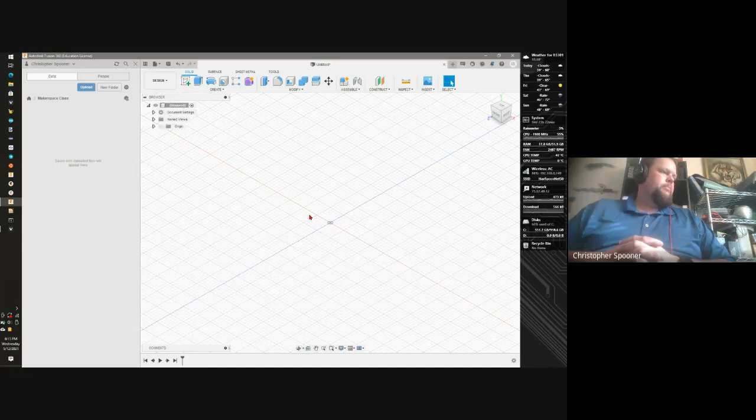Good. Andrew's there. Doug, Sandra, you all set? Yeah, I'm there. Okay. So I'm just gonna hit home. Your screen should look pretty much like mine does, right? We're all at the same place. Thumbs up. Yes. Okay.

So let's talk about the setup for Fusion 360. Inside of here, all your saved files will appear. You can have multiple files inside a project. You can have assemblies inside a project. You can have multiple assemblies inside a file. Some of the project management stuff with Fusion 360 can get a little bit complicated. We won't get to multi-part projects till our third class. We will get there so you can sort of see how to build more complex shapes.

Up top, we have our toolbar. And under each of these, if there's an arrow, there's more tools underneath it. The UI is also scalable. So if, say, your window is smaller, the number of buttons available will hide more under the menu. If you have a bigger screen, you'll have less stuff hiding under the menu. Does that make sense? Yes. So occasionally things won't be exactly where they are on my screen.

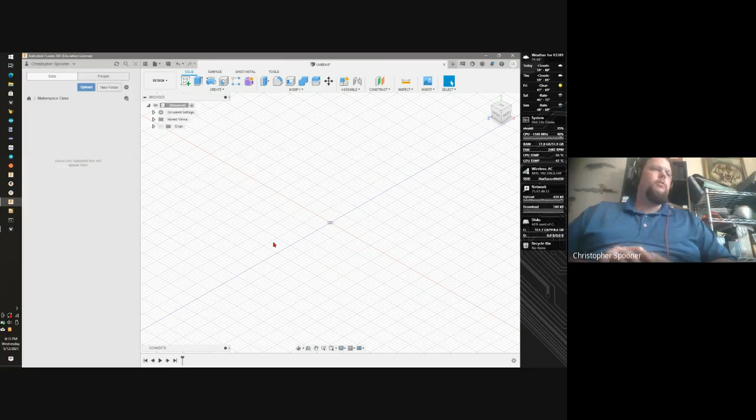Over here we have our browser to show us our sketches, our objects, our bodies. And at the bottom we'll have our timeline, which is where every step we do will get stored. That's really useful because the real power of CAD comes back to the fact that after I make something, I can change it really easily after the fact. So the way Fusion typically works is you work from 2D sketches and you pull those to 3D. Then you create a new 2D feature and pull to 3D.

So if I was going to, say, model a soda can, what shape could I start with? What 2D shape? Rectangle. I could draw a rectangle and then spin it about the axis. Or what else could I do? You could do a circle and stack it. And pull it up. Exactly. So there's two different ways. And is one better than the other? It depends on what you want to do.

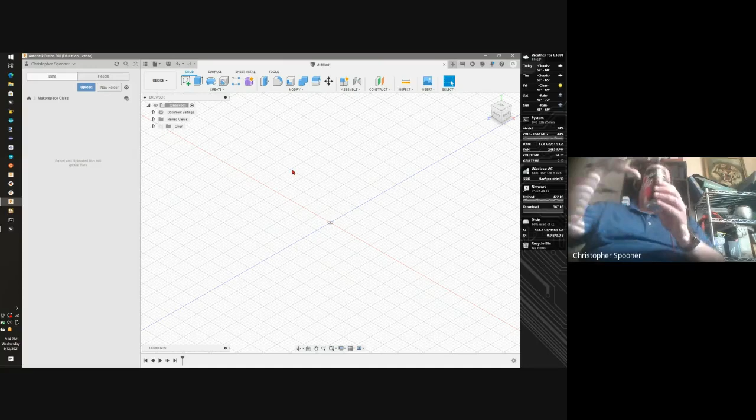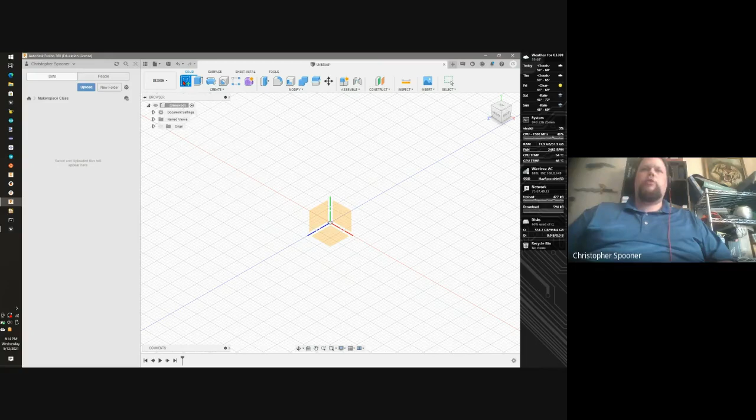With Douglas's method, we can get all this detail sort of thrown in on the first try and make it sort of a fancy outline shape and then spin that all at once. Sandra's method would give us a simple model first and then we could build up more complexity over time. Both have their advantages and disadvantages. But let's start off by creating our first sketch. So the button we're going to be using is the Create Sketch button. It has the little plus sign. And if you hover over any button, it will show you more details about that thing.

Now, after you start the button, you have to tell it where you're going to place that. And we have three options, really. We have the XZ plane, the XY plane, and the YZ plane. I tend to work on the XY plane. The only downside to working that way is that when you bring stuff into your 3D printer, it's going to come out sideways because Fusion thinks the XY plane is your screen and Z is coming out of your screen, whereas your 3D printer thinks the XY is the table and Z is going up.

But let's start on the XY plane, and that's this one back here. You should see the cube rotate, the navigation cube, which is right here. Rotate to the front. And let me know when you're at that. Let me know if you have a problem getting to this view. Hey, Chris, I didn't get the same thing when you hit create. The sketch? Can you back up one second? Yep, you said click on Create Sketch. Yeah, unfortunately, I don't have a separate monitor, so I'm sharing tiny screens here. Okay. Click that. Okay, got it now. And then I'm gonna pick this view, this side. So I'm looking at the front of the cube.

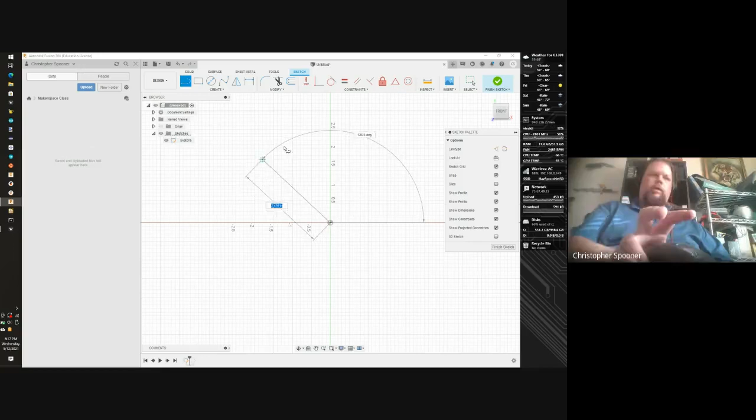So basically in CAD, place points. And I'm going to move straight out to the right, and I'm going to place a point. I'm not going to worry about how big the square is. I'm just going to place a point, and it's going to create another line.

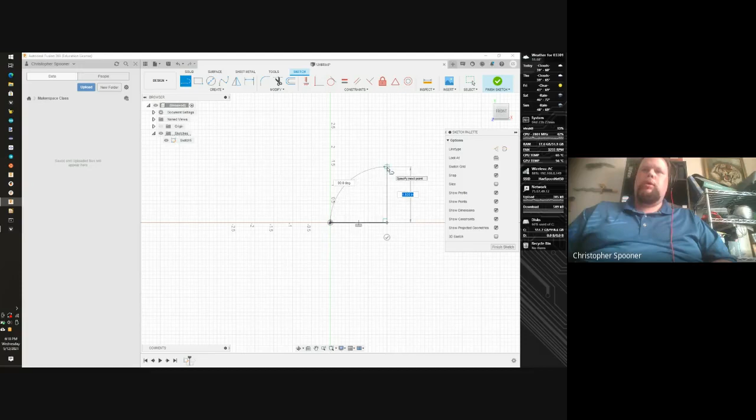I'm then going to create my second point vertical to my first point. It's going to sort of snap and create. I'm going to snap back over my first point. So I'm coming back around, making a reverse C, and I'm going to come back to my first point. And now, there's no more lines coming out of it because I have a closed shape. Does everyone have a square? Or a rectangle? I have a rectangle.

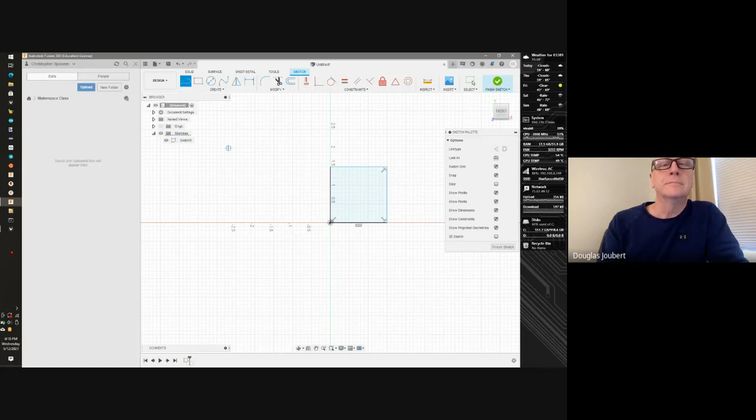Good. Chris, I had a rectangle, but it didn't move like yours did. You want to share your screen quickly so I can take a look at what yours looks like? Yeah. Let's see. It's under the present button. It's going to ask to take control, and that's fine. All right, can you see that now? Yep, I see what you have.

So let's just give yourself some more space. We can actually hide that left-hand panel by hitting the X. Yep, that helps. There you go. All right, so let's go to the line tool. Oh, you have to click under solid. Nope. Okay, I see what you're doing. On the upper left-hand corner of your screen, there's a thing sort of like a J on its side. Yeah, click that. That's the line tool. Now we're going to click on the origin.

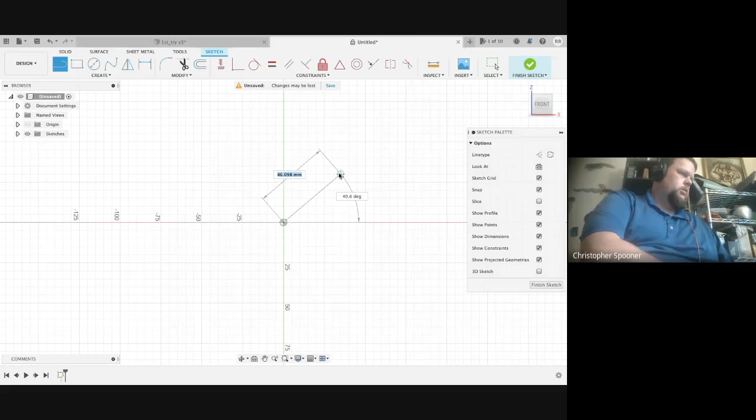And now go straight over to the side. Click. Now go up. You don't have to click once. So go straight up, so it's vertical. It'll snap. Okay, hit escape. The escape key will stop us from doing anything. Okay, so let's Control Z twice. Oh, Command Z, I'm sorry. Command Z twice. There we go. Okay, so let's go to the line tool again, because escape got us out of the line tool.

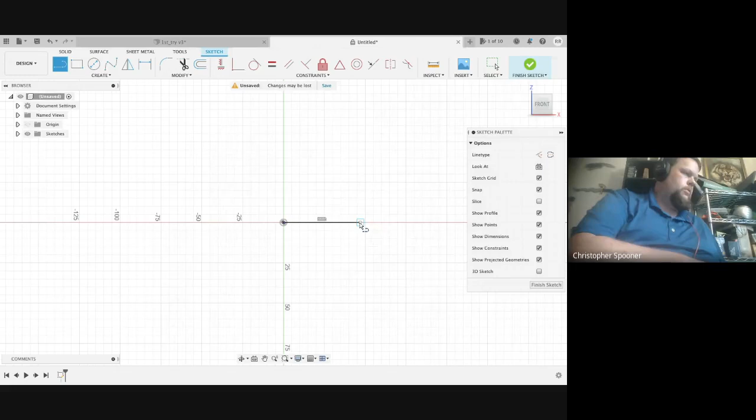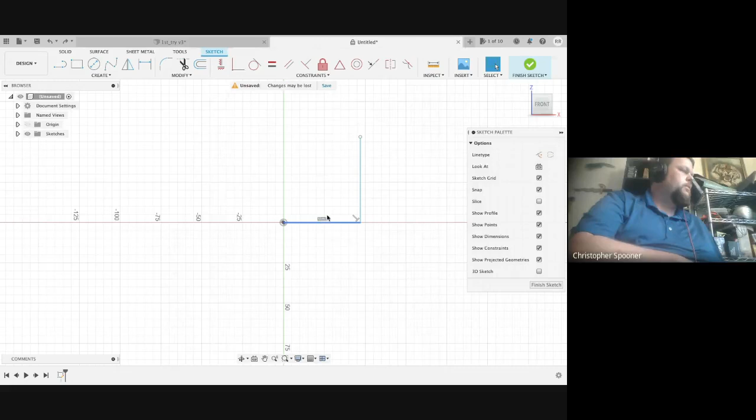So reselect the line tool. No, we have to go back to the line tool, the sideways J. Yep, there. Now click once, down, up. Now go straight up. Click down, up. Oh. Click. Now go to the side. No, not click and hold. Click, let go. Hit escape. Control Z, it's okay. Go to the line tool again. Every time you hit escape, it gets you out of the tool, so go back to the line tool.

Now, the trick is you can't click and drag. You click, down, up. Move your mouse, down, up. So click. Now move it straight over to the side. Click, down, up. Now come back to the origin again. All the way. Down, up.

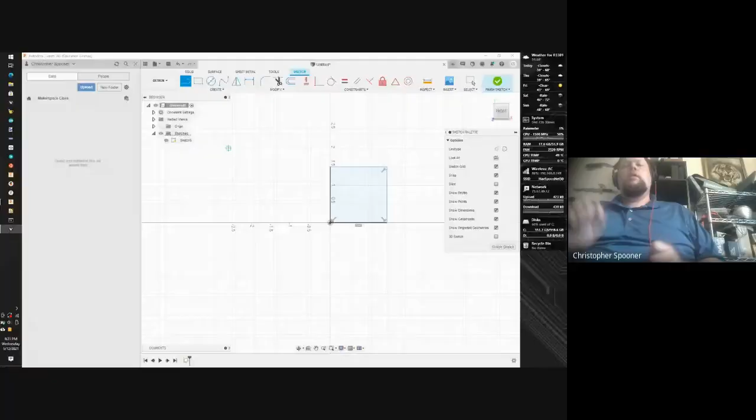Good. And that's exactly the reason why I do this exercise with the line tool instead of using the rectangle tool. Every tool in CAD is click, release. There are some tools that are click and drag, like the tangent arc tool, which is good to know, but it can cause problems. So that's why I draw this rectangle exactly the way I did.

You're not the first person, nor will you be the last person, to have a problem with drawing the lines initially, because it's not anything you've dealt with. If you've dealt with art programs, they're click, drag, release, not click, down, up. Okay. All right.

So let's talk about navigating this space. I'm not sure, Doug, on yours, but if you have a mouse wheel, if you push down on the mouse wheel, we can pan and move around. If we push down on the mouse wheel, which is middle click, you can drag.

I'm not sure what yours will be. I didn't know my middle button pushed down. Does it? Yes. Good, good. We can also zoom in and out by using the mouse wheel. Now, the zoom follows your mouse cursor. So if you're right over your shape, that will be the center. But if I'm over here and I zoom, it's going to zoom over here.

Lost. Got it. If you click on the front of the navigation cube, it will recenter. Oh, sorry. It's got a line tool. And then click on the front of the cube, and it should recenter itself. Really?

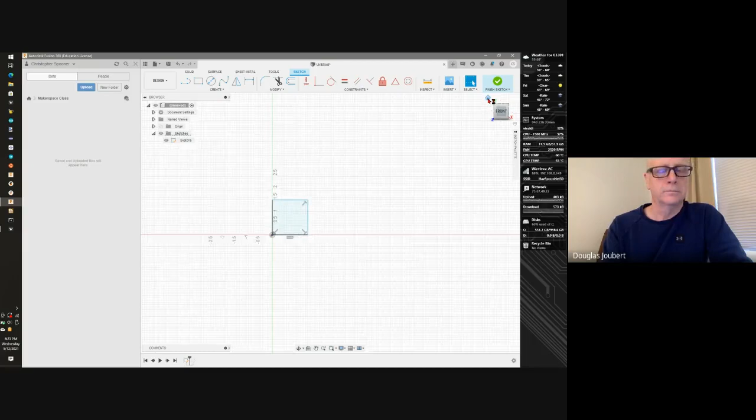Okay. If you get lost, sorry, this is where Inventor and Fusion are slightly different. If you get lost, if you navigate over the navigation cube and click the little house, it will bring you back to your home view. If you click front, it will rotate you back so you're looking at your thing.

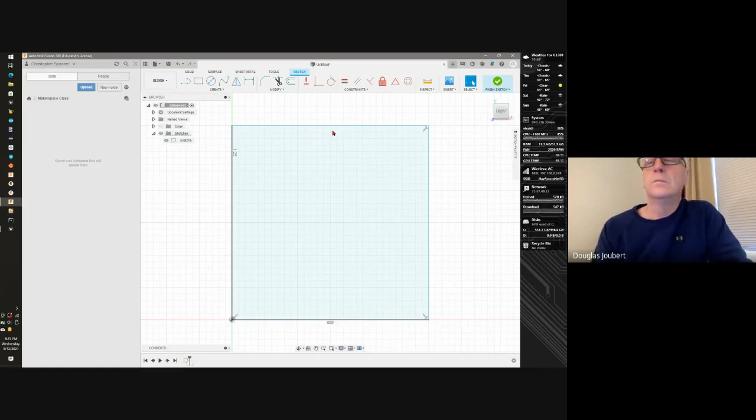Now, if I look at this square, you'll notice that two sides, this bottom and this left side, are black, but the right side and top are blue. I'm going to hit escape to make sure I'm not in a tool. If I grab this point, I can move this around. But if I grab this point here, I can only move up and down. I can't move left and right. Same with this point here. I can only move it back and forth, but not up and down.

And the reason I can't move those is because this line and this line are locked. They're constrained because they're tied to the axis, and it guessed the right angles. Whereas the two blue lines are unconstrained. It knows they're right angles, but doesn't know how big they are. Comfortable with moving around and where we are?

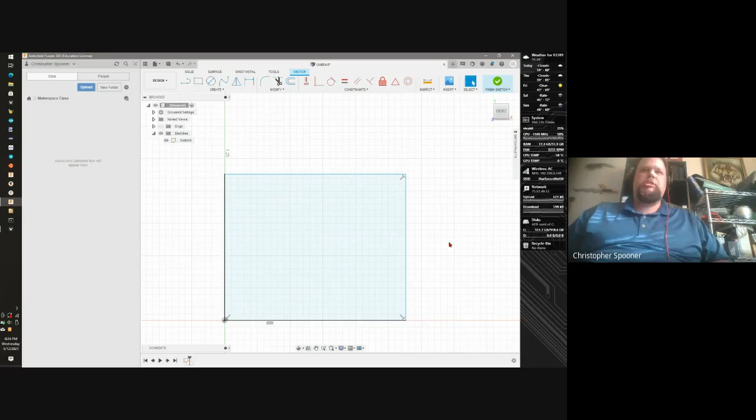Yep. All right. So if I'm going to 3D print something, I can make things any size in CAD, and I don't know how big they are until I dimension them. They do give you the rulers on the sides of Fusion to give you an idea of how big you are, but really, I need to set a size. So what we do is we're going to set dimensions, and that's this goalpost button right here. Also notice there's a little parentheses D. That means if you press the D key, it will automatically bring up that tool.

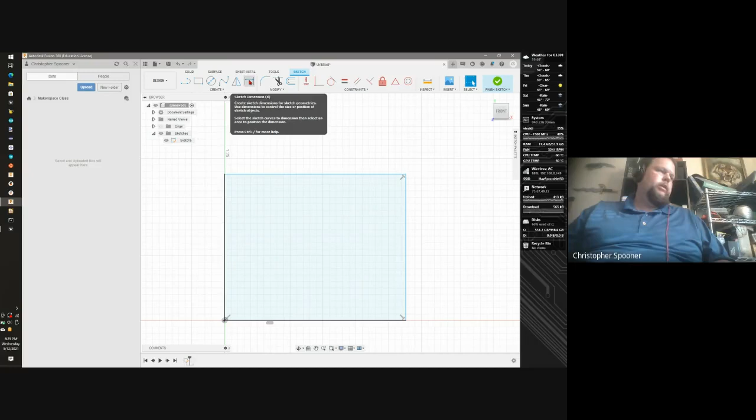So now we're going to dimension. Dimensioning works sort of like drawing a line. We're going to click on what we want to dimension, and then click to place the dimension. So watch first, and then I'll undo it. I'm going to click on this line, then click again to place it and edit it. So dimension tool, click on the line, drag up, click again. And I'm going to set that to 1.

Now, the only thing that's not locked down is the blue line, the top. So I'm going to click on the left or right side, doesn't matter which one. I'm going to click and make that also 1. At this point, the square is black. Let me know if you have a problem with this point.

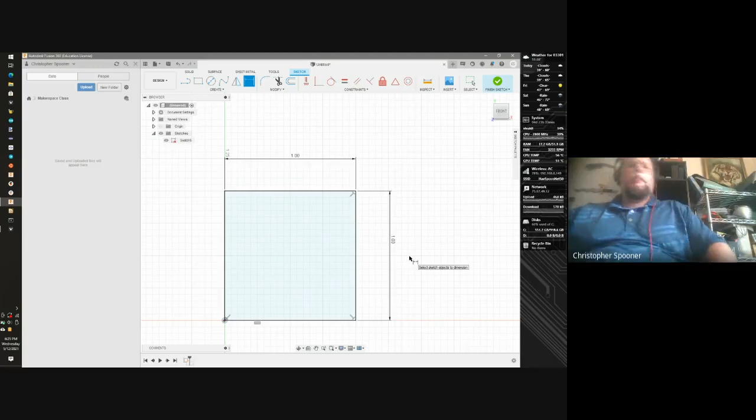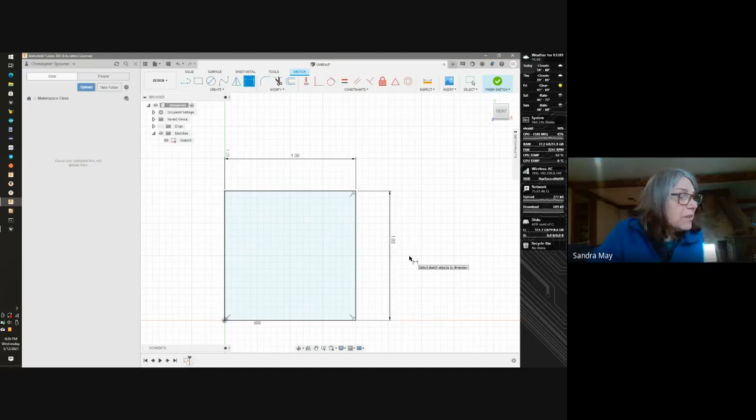Chris, my thing doesn't look like yours. I don't actually have the line showing from end to end. I do have a measurement. Yeah, can you show me your screen so I can take a look? Can you talk me through that? I'm sorry. Yeah, of course. In the Meet view, there is the button on the bottom left-hand corner. There's raise hand, turn on captions, and then present. Click on the present button. Okay.

It's going to ask you to share screen. It's going to ask which one. Share the one with Fusion on it. Otherwise, I can't see it. And then click share once it pops up. So it's going to pop up a little window asking which one. Okay, there we go.

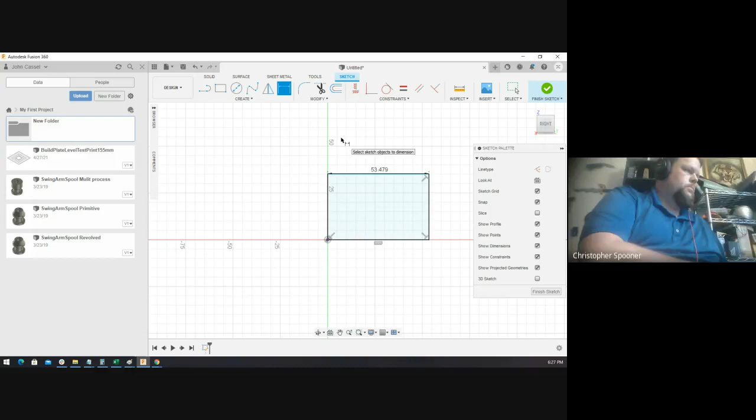Okay. Aha. So I know part of the problem. We will fix that. Should I give you your screen back? No. It's fine. So hit escape right now, just so you're out of whatever tool you're in. The escape key is your best friend in CAD. What happened is you clicked twice on the line really close together. So hit escape, so you're outside the tool. Yep. And now click on that 53.479 and just drag it. Click and drag.

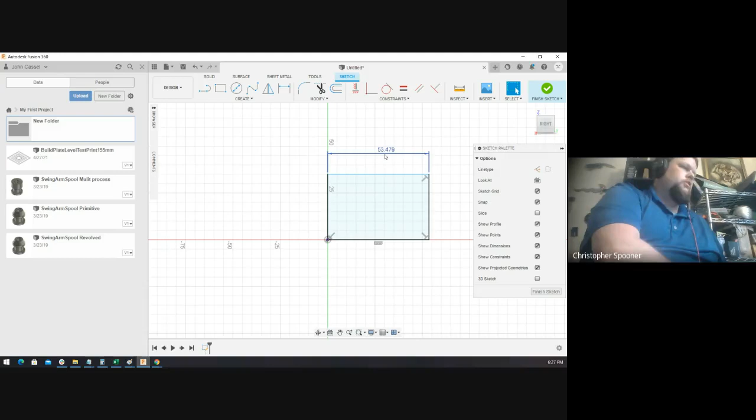There you go. Thank you. And you're gonna do 25 instead of 1. Okay. You're in millimeters, and I don't know how to change the units in Fusion off the top of my head. Okay. Well, how do you change that number? Double click on that number now. Double click, okay. Yep. It lets you edit it when you create it, but if you need to fix it after, you double click. Enter. And hit enter. Yep. And then do the same for the side.

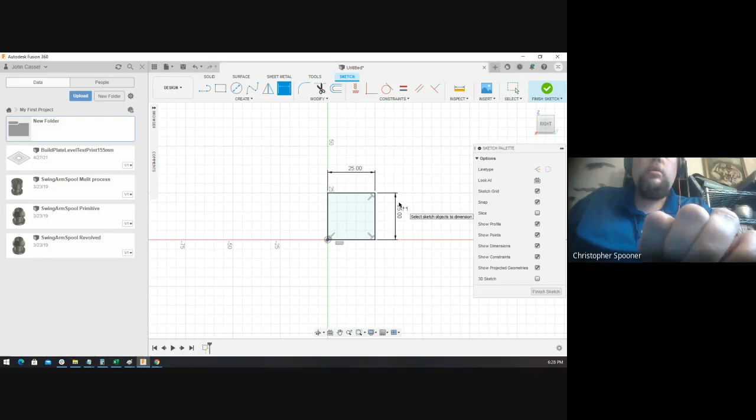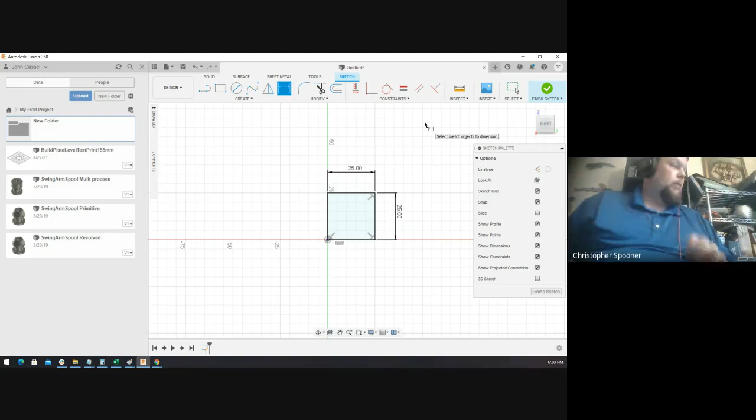I'm going to quickly jump over to a web browser and just Google how to change units. Yeah, John has a subscription, so I'm actually in his Fusion 360, so he probably has settings I may really have to monkey with. Oh, actually it's really easy. Okay. So I'm going to take over presenting, and I'll show you. I'm presenting. Okay.

So if you go up to the top left-hand corner, there's a little drop down, a little arrow here. It says Document Settings. Click on the little arrow next to Document Settings. Upper left-hand corner. Okay. And it should say Units. If we click on the little pencil next to that, you should be able to change that to inch. There you go. And now you have to resize your thing because it's probably like 0.99 or something like that.

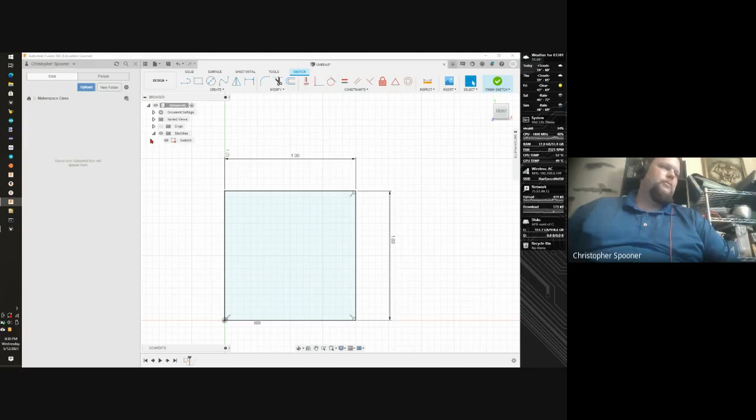Chris, they don't teach metric in schools? No, I use both, depends on what I'm doing. I use metric hardware as default because I have a bunch of metric hardware left over from my 3D printer builds. I think in English, unfortunately. My brain is stuck. I can convert back and forth.

That's why I told Sandra to do 25. She could have done 25.4 and had it dead on. But I figured if we were gonna live with metric for today, I don't want to deal with silly units the whole time. All right, so we have our square. Now, let's say I try to dimension a little more. Take a look at my screen, don't follow along. I try to dimension this side. An angry message says, adding this dimension will over-constrain the sketch. Choose OK to create a driven dimension. What the heck does that mean?

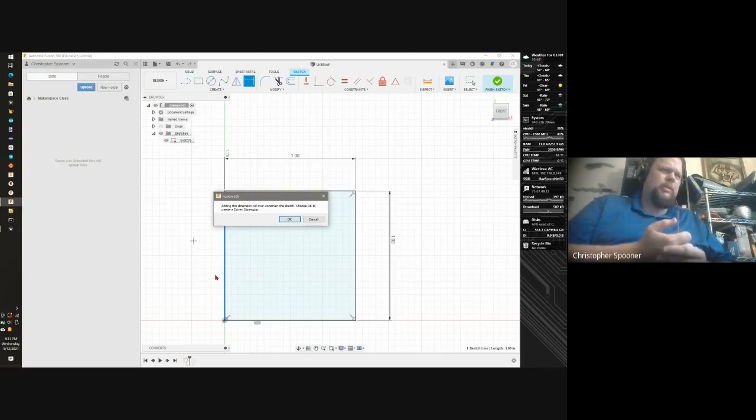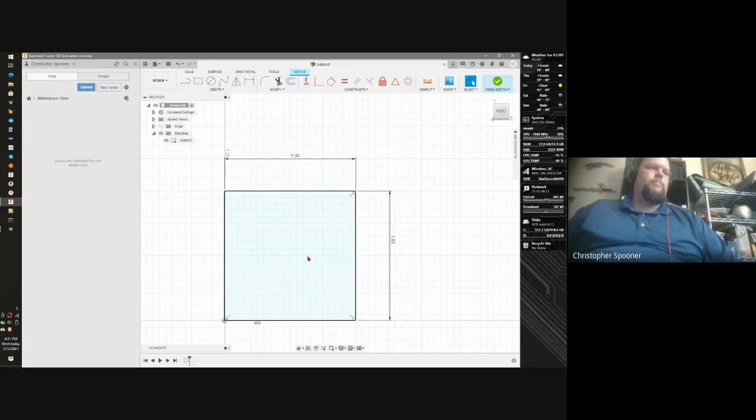Well, when I drew my square, I snapped at right angles. If everything's a right angle, and this side's 1 and this side's 1, there's no way this side could be anything but 1. Does that make sense? Yep. I can get a driven dimension, but I can't edit that number. But if I edit this number, just watch, that will automatically change to follow it. Once my sketch is black, that means I have a fully constrained sketch. That is what I'm looking for before I move on. Black is good. All CAD packages, black is the happy color.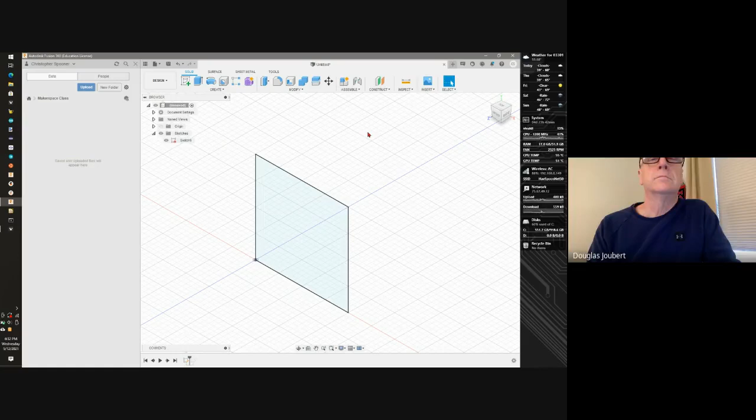All right, so we have our sketch done. It's black. I'm going to click the big green finish sketch button in the upper right-hand corner. Now, Chris, my rectangle is living in a different plane than everybody else's. The cube says I'm looking at the right side and not the front. Is that going to matter? No, it actually doesn't matter at all. You can build the whole thing in any direction. Occasionally it will mess with your horizontal and vertical constraints, but because they're both under the same button in Fusion, it shouldn't cause a problem.

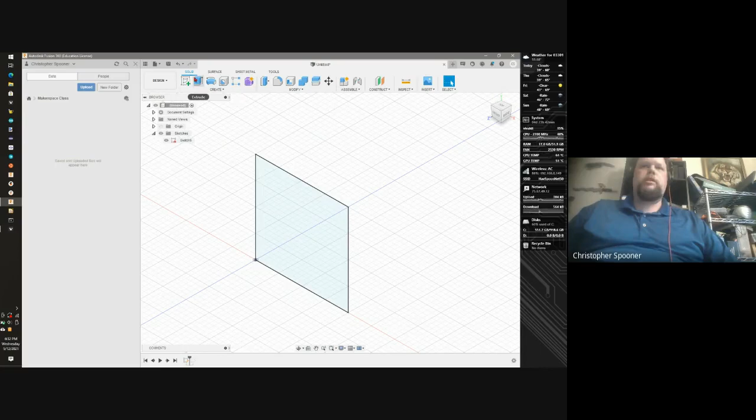So I now have a floating rectangle. I need to pull that into 3 dimensions. I'm going to use the Extrude tool, right next to the Sketch tool. And there's a text area. I can grab the arrow, but that's not how I think. I like numbers, so I type the number. I'm going to type 1, and a big gray cube.

Could you hover over where Extrude is in the menu bar? Yep. It's right next to the Sketch tool. You have to finish your sketch first. Then Extrude is right next to your Create Sketch tool. Ah, okay. It's not there. It could be under the Create menu. So remember, these buttons can go away sometimes. If they are hiding, you can click Create, and it's all there. We can hide our files now. That will give us more space.

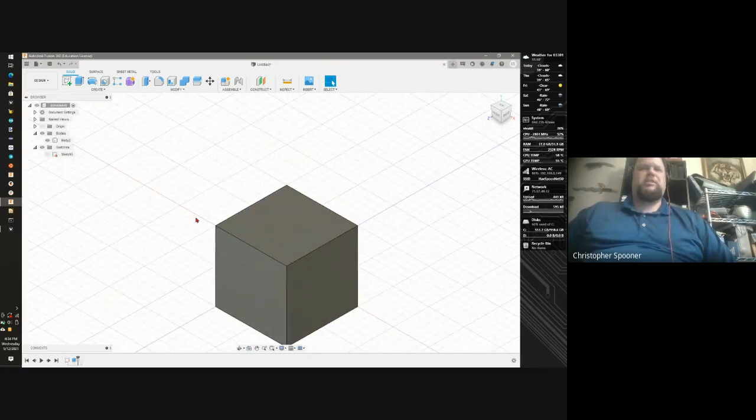Everyone have a cube, or does anyone need more time or any help? I have a cube. It doesn't have a grid background. It doesn't. No. It shouldn't really matter. The grid's just there to show you that it exists. It shouldn't affect anything. Okay. If the next thing has problems, then we'll go back and I'll take a look at your thing. But because you're running a pro account with custom settings, I don't want to.

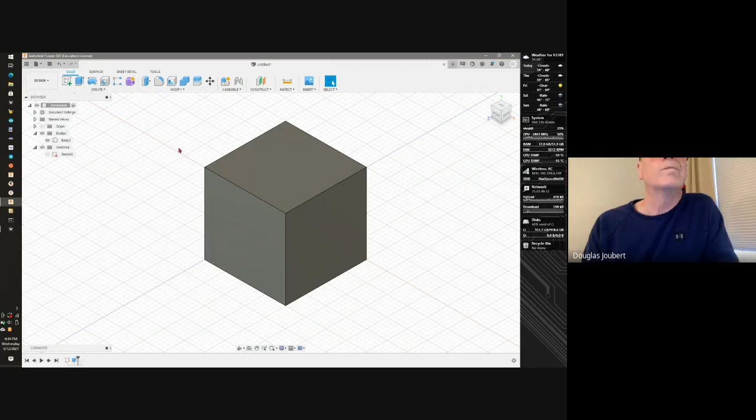Oh, I'm sorry. No. So I downloaded this ages past, and I couldn't come up with a way of telling Autodesk, oh, come on, I only used 2 of the 30 days. That's all right. You should be able to use it without a 30-day trial. You should be using the hobbyist license. Okay, I'll try to get that done before the next class. No worries. I can always help you with it.

All right. So what we're going to do is we're going to put a hole in the top of our cube. So we're not going to use the hole tool. The hole tool does not do what you think it does. It kind of does, but it's not the best way of doing things. And more importantly, it's not going to teach us the skills we need for the rest of the stuff we're doing. So we're going to do this by creating a sketch. So I'm going to click the sketch tool, and this time I'm going to select the top of my cube.

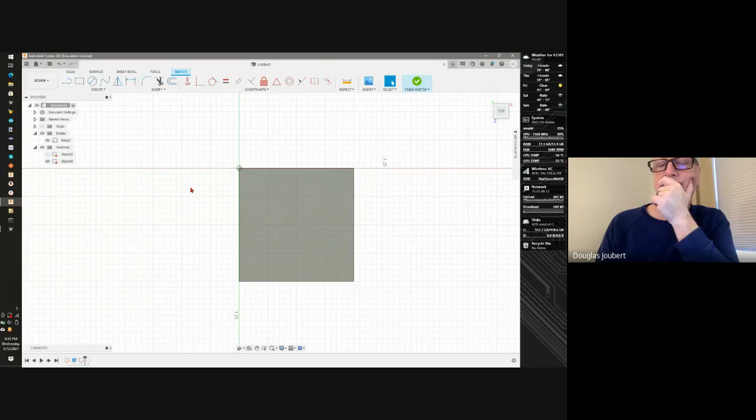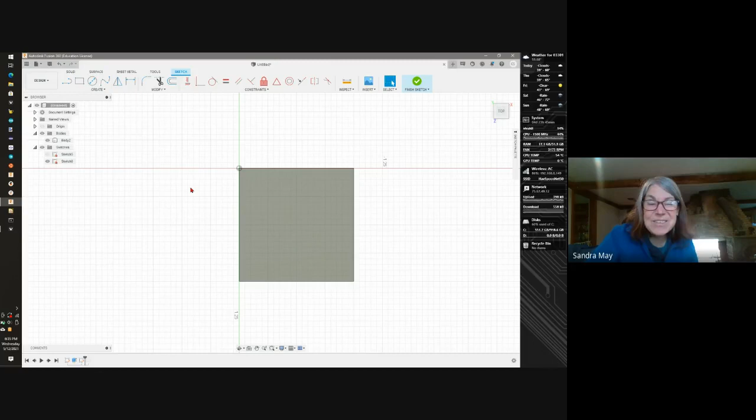If you need help, don't be afraid to ask. I mean, this is the downside of remote teaching is I can't see screens. When I was teaching this lesson back in the before times, I'd be looking around the room to make sure all the screens look like they should look. Trust me, I've seen people break things in such ways that I would not judge for it. I'm usually impressed they break so badly.

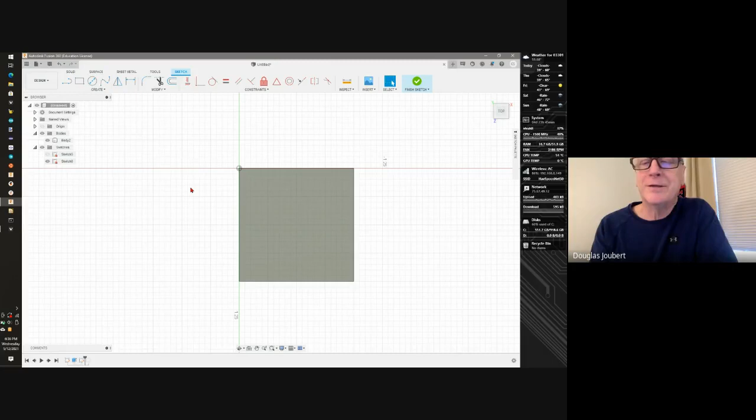So, are you at the square on top, Doug? No. Share your screen. Let me take a look. Chris, I can hear you, but I've lost the screen. What do you mean? My Alt Tab is not getting back. Hold Alt or Command Tab. You can hold Command and Tab several times. You probably opened up a third program or something. Yeah, it's not opening. Huh. Well, Chrome's still open because I can talk to you. Yeah, that's weird, but just keep going. I'll catch up. All right. If you have questions, I can always help you another time.

But we have our shape, and what we're going to do is draw a circle. So I'm going to click the circle tool, and that is the third one over. I'm going to click the center point, drag out, and click again to create the size of the circle. I don't care where I place it, as long as I don't click on a line. If I click on a line, it's going to assume that you want that center point on the line. So I'm going to click somewhere, drag out, make sure I don't click on a line again, and click, and I just have a circle in my thing.

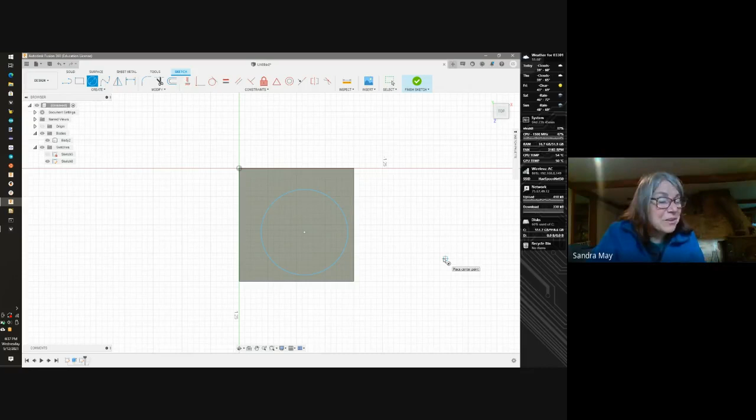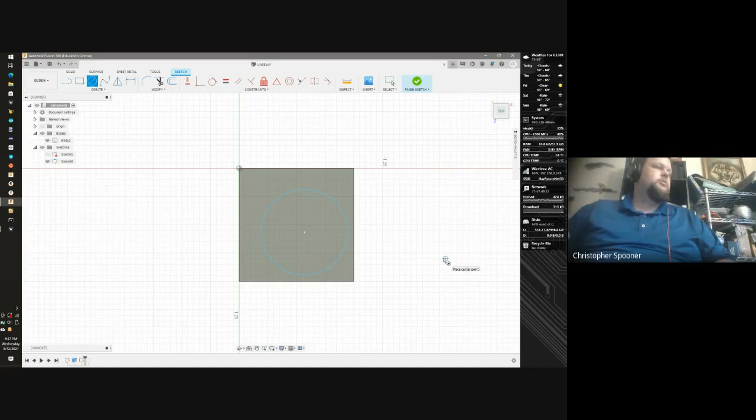I can't hear you, Sandra. You're muted. Sorry, do you have a particular dimension in mind? We'll set the dimension after. So the way we tend to work is I draw my shapes. I then use any geometric constraints, which we'll get to on our next project on the smiley face. And then once I've got my geometric constraints, I put my numbers in. So that way I can always change my sizes later.

Hey, Doug. All right. Can you see me now, Doug? I do, yes. All right.

So I drew my circle. I didn't really worry about where I put it or sizing. I just want to make sure it's inside my thing. So I tend to like to locate my shapes first and then size them. It doesn't matter which order. But there's two things that can move about this circle. I'm going to escape to make sure I'm on a circle. I can move the center point. I can also change the size.

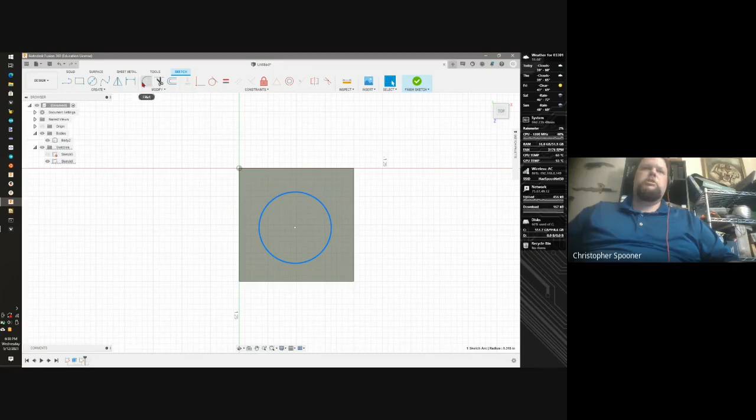I'm going to get the center point locked down first. So I'm going to click the dimension tool, and this time we're going to be doing a distance dimension. So I'm going to click the side of my square and then the center point. And I'm going to move my mouse out. And this time it's the third click to put the dimension somewhere. It doesn't matter where I put it. I just like pulling it aside. I'm going to do 0.5.

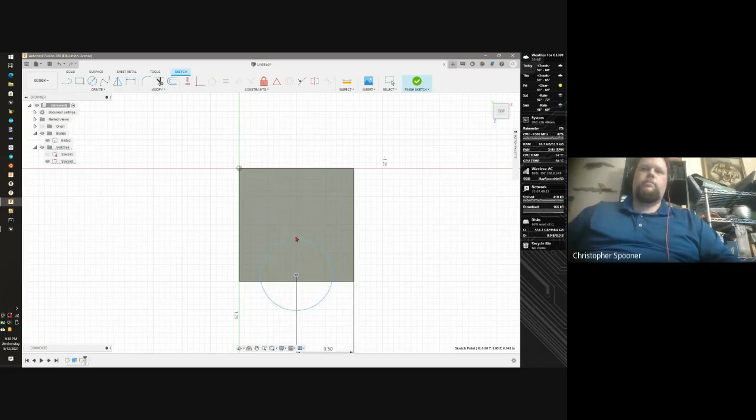So now this circle can only move up and down. It can't move left and right. I'm going to do the same thing again. I'm going to dimension, but this time I'm going to go to the top or bottom. So it's top or bottom, center point, over to the side. It doesn't matter which order I do. I can do center point, side, or side, center point. At that point, the center point should turn black.

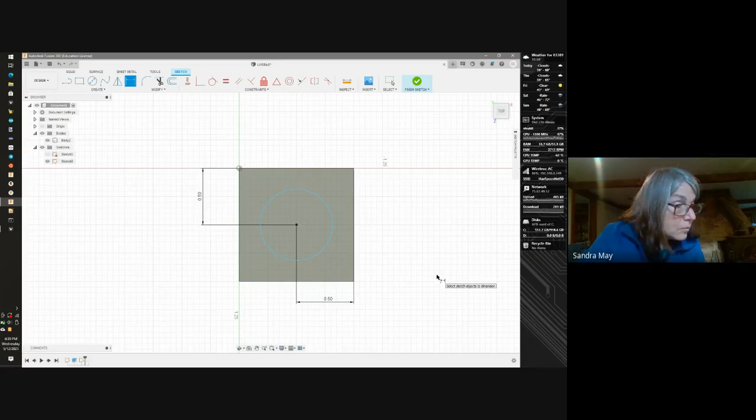Unfortunately, Fusion doesn't allow for relational dimensions as easily as other tools, so I was going to do a thing with relational dimensions, but we're not going to bother. So now that I have that located, I need a third dimension to say how big the circle is. So I'm going to click on the circle. I'm going to make it 0.5. I like the number.

And my circle should be black. If you need help, don't be afraid to ask, because we're just learning. It's easy to get yourself messed up. I always hit escape when I finish a tool because it's so easy to click on something by mistake. Everyone with a circle black, turn black.

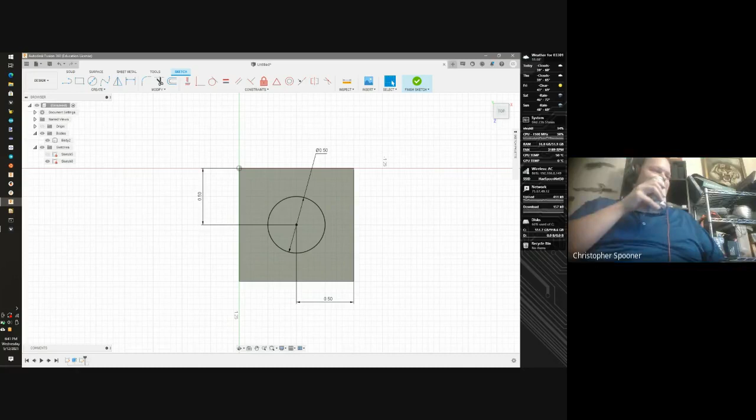Andrew, I assume you mean K. Okay. Oh, okay. Yeah. Y for yes. Okay. That makes sense. Sorry.

Yeah, I wonder if I'm running into a setting problem again. It doesn't want me to leave the circle behind and move on to use the dimension tool until I tell it the dimension of the circle. I've now started from scratch 3 times and redrawn this circle. You can just type in the size. I'll do 0.5 for the circle size. So okay. If it does that, yeah, I think it probably wants to dimension as you go. It's probably a setting. I don't want to change people's account settings.

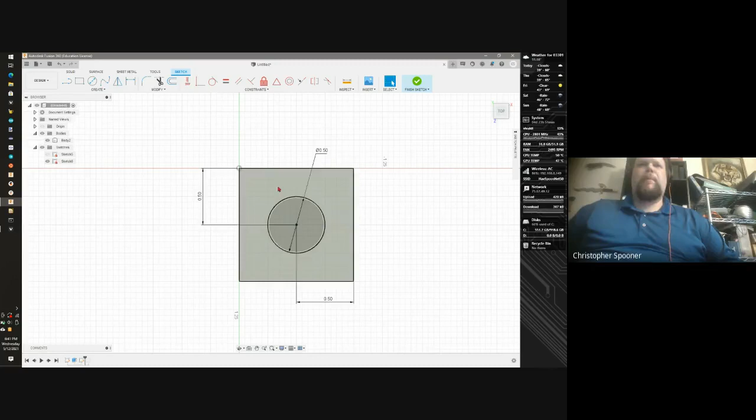Okay. So if it does, I'd have to see it to tell you, but I think you can probably skip past it if you just click somewhere. But you can also always put a number in there and change it after the fact, which is nice. Okay, so now I have a circle set with a dimension of 0.5. But I'm wondering how I can duplicate the thing you did with giving it constraints, or can I not because I'm locked in now? No, you're good.

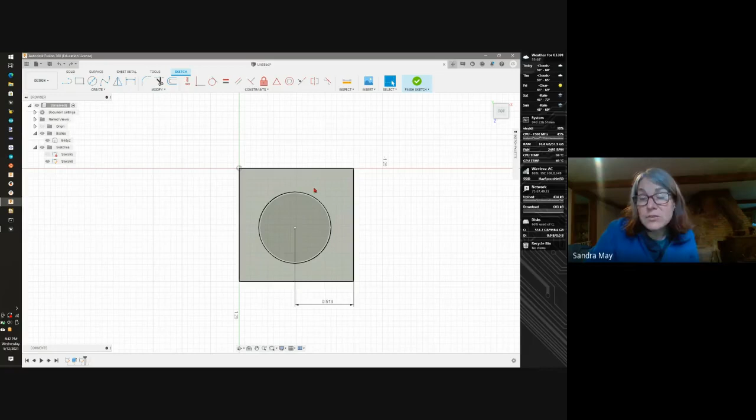Until the center point of your circle is black, you can still add. Mine should look sort of like yours, right? Your circle's still blue, right? Yeah. Okay. So now you're gonna click the dimension tool. And you're gonna click either the center or the side first. Doesn't matter. So I'm gonna click center, then top, and then move out. And I'll set the side to 0.5. The same thing: click on the center, click on the side, and then drag, 0.5. Your whole thing will turn black at once instead of just the center point.

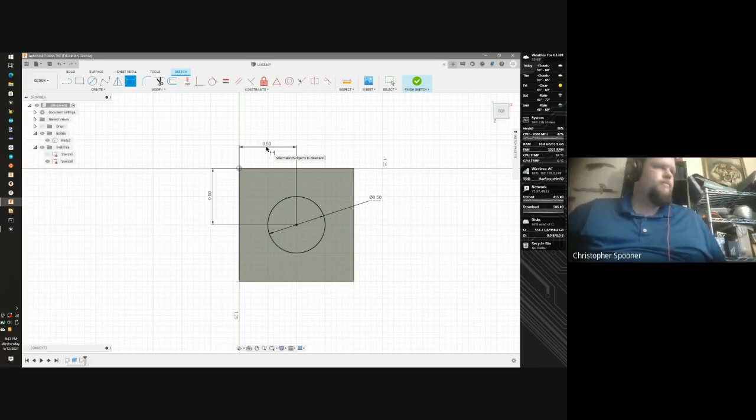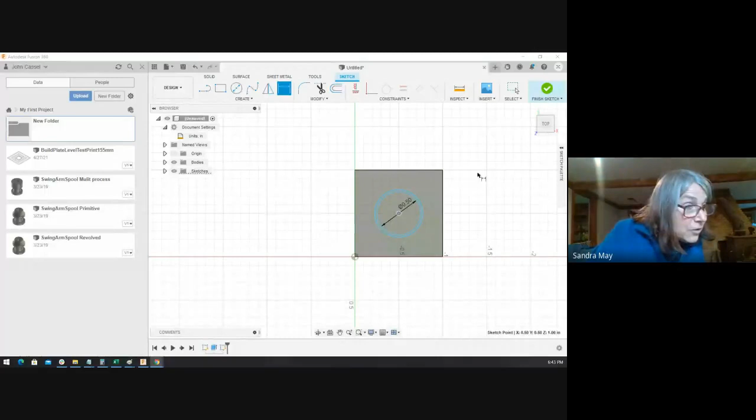Is it working? I'm afraid not. All right, let's share your screen. Let's take a look, because once I see you doing it, I'll know exactly what's wrong. Okay, yeah, so for starters, I seem to have created 2 circles and I'm having trouble getting one to go away. Okay, so we're gonna hit escape to make sure we're out of the tool. And you're gonna click on the outer circle. And then click the delete or backspace key.

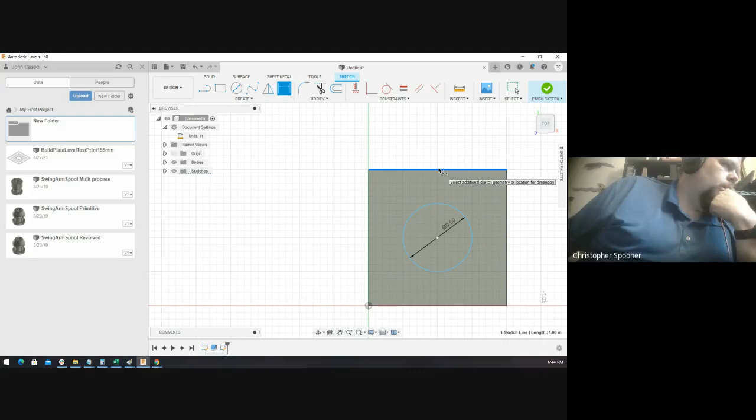All right. Good. Why don't you zoom in a little bit so it's a little bigger. Yep, perfect. Now we're gonna click dimension, and we're gonna click on the top of the square, and now click on the center of the circle, and now move your mouse out to the side. Doesn't really matter where. Click. Type 0.5. It might already be 0.5, but good.

Now let's do the same thing. Let's click on the center of the circle, and click on one of the sides of the square. Not the top or bottom. Yep. Click. Now move up. Yep, that's fine. 0.5. There you go. And yours, it's fine. It's just that instead of dragging up, you went to the side. It doesn't really matter. You can see the line. It's black, and we're happy. Okay.

All right. So our sketch is black. That means we're good. So we're going to finish the sketch. And now we're going to pick the extrude button again. Now, this time we have to tell it what we're going to work on. So we're going to click on the circle. So I can select the circle, or I can select everything not the circle. But I'm going to click the circle.

And then we have to tell it what we're doing to it. So let's start off by going where it says extent type. So it's the 4th item down. I'm going to pick all. And then at the very bottom, there's operation where it says new body. We're going to click the drop down and we're going to pick cut.

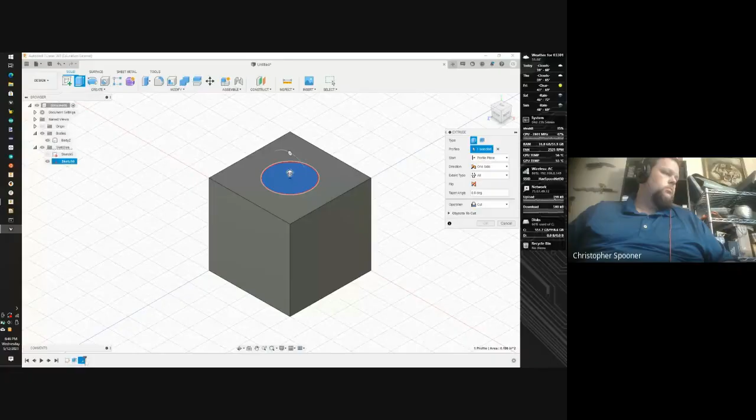Now, right now, the arrow is pointing the wrong way. It's pointing up. I want to go the other way. So I'm going to click this flip button. And all of a sudden, I should have a red cylinder through the center of my square.

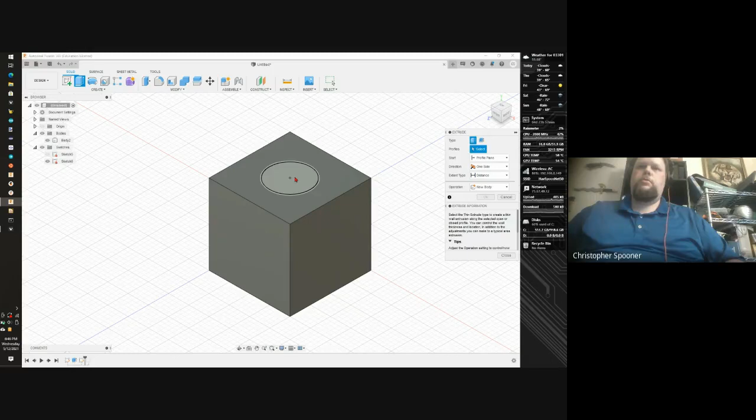So I'm going to escape and do it again. I'm going to click extrude. I'm going to click on the circle. I want to tell it that I'm cutting. I want to tell it that I'm going all the way through, and I want the arrow pointing down through it. One more time. So extrude, circle, all the way through, cut, flip.

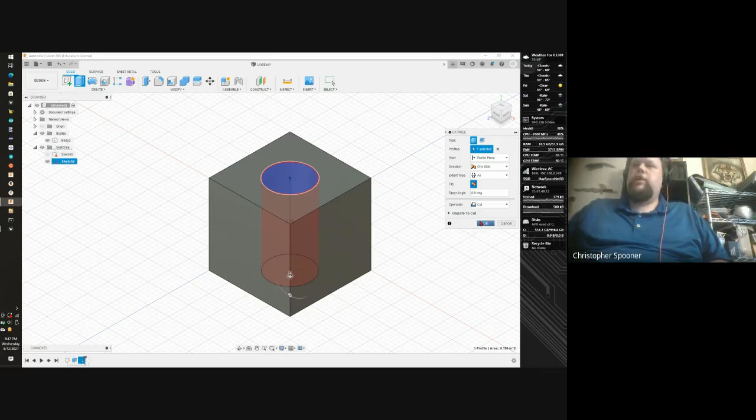So is anyone doing it again or anything? Once I'm done, I can hit OK, and it'll cut all the way through. But I'm gonna leave it until you're done. So my OK button is grayed out, so I must have missed a step. Did you put your mouse over it? Well, it is now. Because mine's gray until I have a mouse over it. Is it grayed out when you put your mouse over it? Okay. The button isn't changing. Okay. Let's see your screen quickly so I can take a look. Okay.

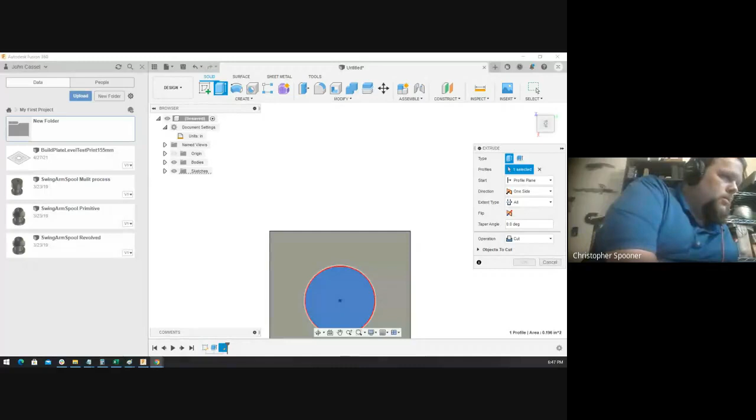Yeah, CAD's a visual medium. I have tried to describe their error. Yep. Put your mouse over the navigation cube, please. Over top, right hand corner. Top. Yep. Click the little house. There's a little house. Yep. Okay. Hit the flip button. It's halfway down in the extrude dialog. Down. Yeah, click that. There you go. You were trying to cut nothing.

Oh, okay. Yeah, I don't know why Inventor, when you say cut, changes the direction of the operation by default. Fusion 360, for some reason, just doesn't. And I don't know why. If it makes you feel better, when I did my prep for the lesson today at 5 p.m., I had to look for a second too. Because I'm like, why isn't it going the right way? You could have grabbed the arrow and pulled it down, but I don't like the arrows. They're not good.

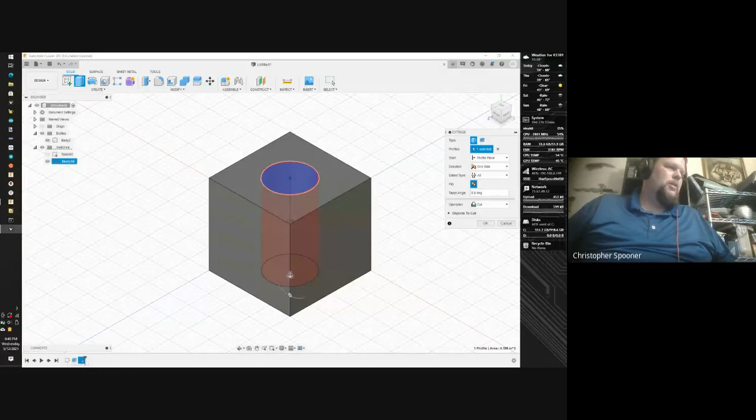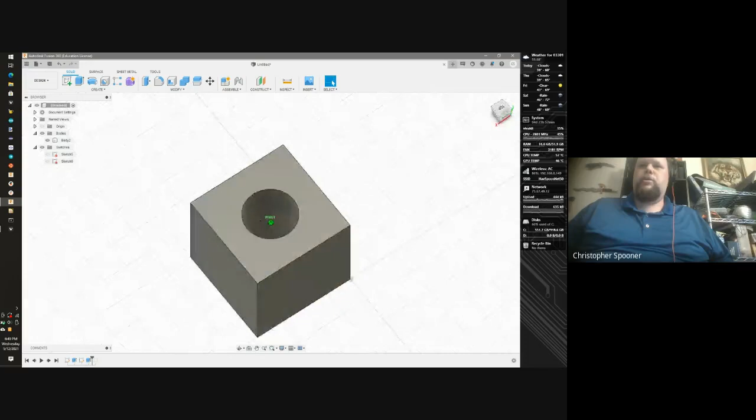So, again, there's a lot to learn here, and that's why the next thing we're going to do is going to be really good for you guys, and it's something I suggest when you have a chance, play around with it, and that's why I call this the practice cube. So we're going to hit OK. And now we can click our navigation cube, and we can rotate it around. I can see I got a hole in my cube.

So what we're going to do now is I'm going to click back on my house, and we're going to start sort of just playing with this. The goal here is to get comfortable with drawing shapes and getting them locked in place and then doing stuff to them. So I'm going to start a sketch on the side of my cube. It doesn't matter which side, because at this point, we're going to start just playing around with stuff.

Under Create, there's a bunch of different shapes. I have rectangles of all sorts. I have arcs. I have polygons. I have ellipses / ovals. I have slots, including like curved slots and stuff like that. I have splines that make cool shapes. I have conic curves. I have text. I have all sorts of different shapes.

Let's play with the... which one do I want to play with? Let's do the curve, the 3-point arc slot. This guy's a little complicated, but so that's under Create, under slot, and it's like the fourth one down under slot.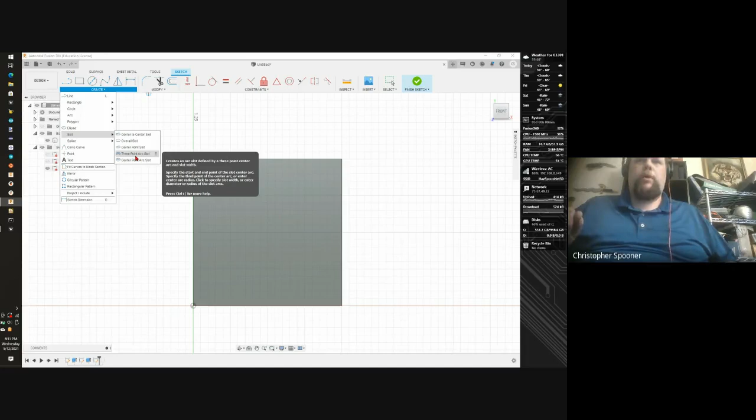Now, if I mouse over that for a moment, it will tell you how you do it. So it says you specify the start and end points of the slot, then specify the third point for the arc center, or enter arc radius, and then specify the slot width, or enter diameter or radius for the slot arcs. So this guy's a little complicated. So watch first and then play with it. And if you feel it's too complicated, we'll try a simpler one.

So I'm going to click once. I'm going to click twice. Now I have an arc. I'm going to click a third time. And then I'm going to drag out and click a fourth time, and I have like a smiley face shape. And I didn't worry about anything I did. I just sort of placed stuff.

Anyone need help with that? Or do you want me to do a simpler shape? When I go under create, it's only giving me 3D options. Oh, did you start a sketch? I think so. I did create sketch, but my cube from before is still there. Did you click on the side of the shape? Okay, you probably click sketch and make sure you click on the side of the cube first. If it doesn't do it, then share your screen. I'll take a look.

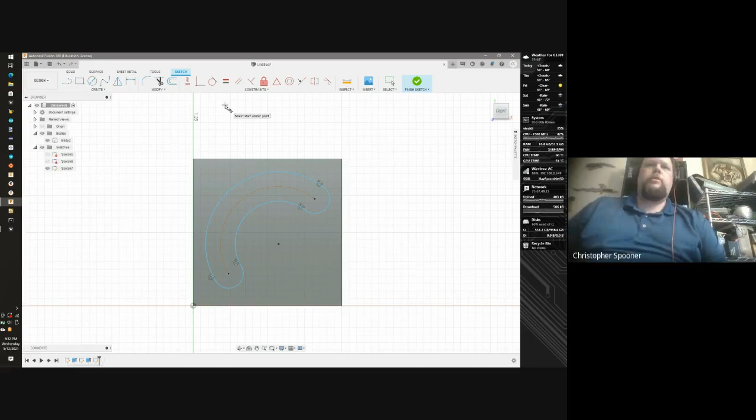Okay, so we were under slot. Yep, and then there's under slot, and then I did 3-point arc slot. Okay. Yep, you weren't in a 2D sketch. That's what happened. Okay. Thank you.

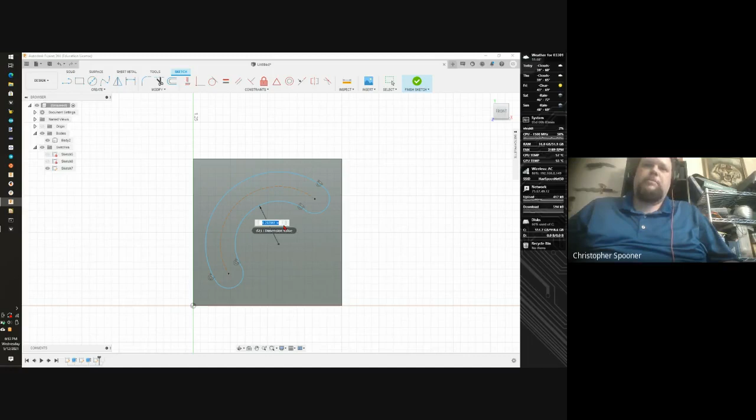So at this point, I need to lock this. I want to make this turn black. I'm not going to really care about anything though. I'm just sort of playing with it. So I'm just going to go to my dimension tool, and I'm going to start throwing numbers at it until it turns black. So I'm going to start by clicking on maybe this center arc here. And I'm going to put a number. I'm going to do 0.3. It doesn't matter. Pick a different number if you want. I don't care.

Nothing turned black, so I haven't made any real progress yet. But I'm going to set one radius to 0.3. It doesn't matter what. I'm going to click now on this smaller arc, and I'm going to pick, I don't know, 0.1. Now, I can move this around, and I can change the shape of it, but I can't change the size of the two to each other. Like, it's starting to become more of a thing.

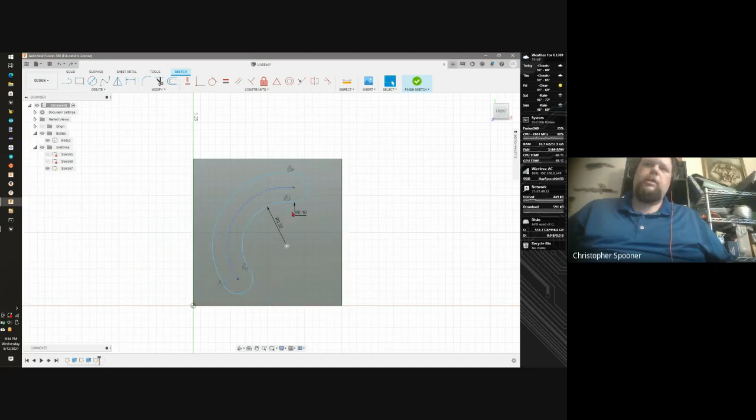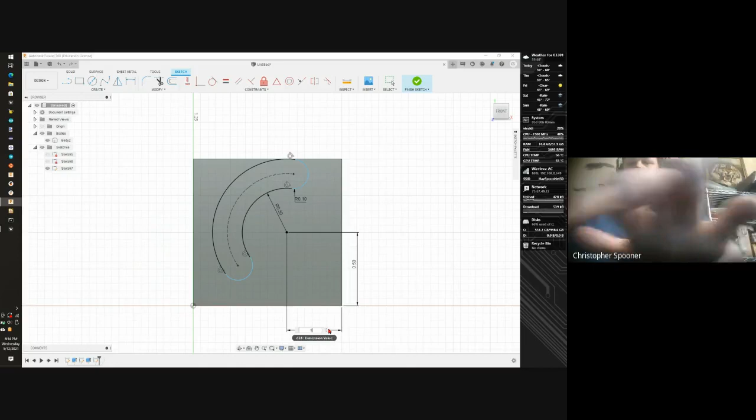I see some points. Maybe I should take these points and start locking these 3 points. Maybe that'll help give me space. So I'm going to go to Dimension Tool. I'm going to go from the side to this point here and go out. And I'm going to do 0.5. And then I'm going to do the same thing to the side. And I'm going to go 0.35. Ooh, I've started to get some stuff turning black.

If I hit escape, I can still move these two arcs. But nothing else moves. I can't move anything else in and out. And again, the numbers here don't matter at all. My goal is just to lock stuff in place to keep it from moving on me. Maybe this time I'll dimension from this point to this point and do 0.5. Hit escape. Do a drag test. Now these will move, but they always move together now automatically. So I'm slowly pinning this shape down until it can't move anymore. Does that make sense?

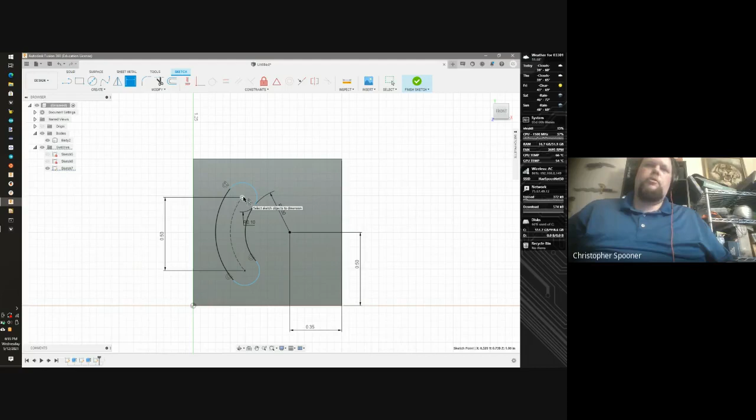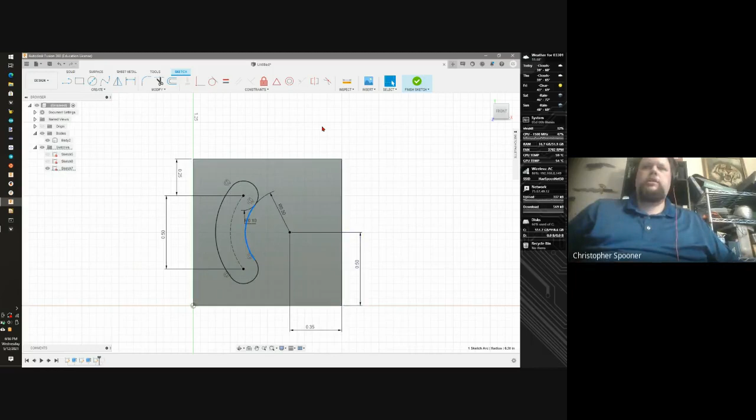I'm going to do one more from here to here. And I'll go 0.25. And now the whole thing is black. I can't move any of it. If I escape and try to drag it, it won't move. And all I did is just throw numbers at it until it won't move anymore. I put a dimension on it, saw how it can still move, put another dimension, see how it can move, put a dimension on until it can't move at all. And the goal here is just getting used to dimensioning things. It doesn't matter what the numbers are, it's just getting used to actively dimensioning points and arcs and sizes and stuff like that.

Anyone need help with anything?

All right. So now, even if my shape's not fully done, if you're not fully done, I just want to show you the last step because we're running out of time. I can probably go a few minutes late, but I don't want to keep you guys past your 7 o'clock. But I'm going to finish my sketch.

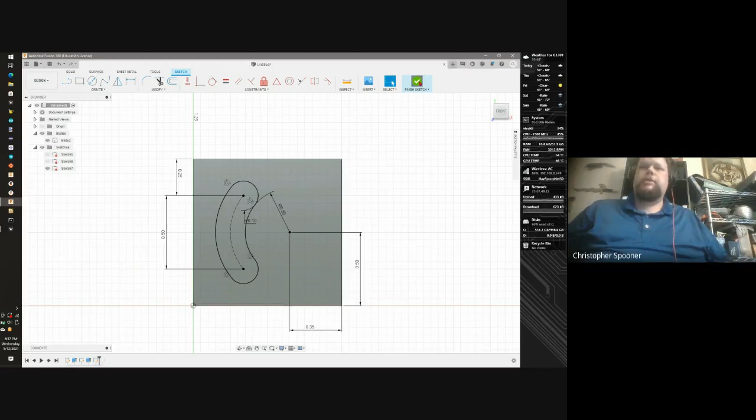And now all I'm going to do is I'm going to click Extrude. I'm going to click on that shape. And I'm going to make it go, I'm just going to pick 1. And the default operation looks like join. So I'm going to hit OK. And I just have a thing sticking in my cube now. And the whole point of this is now getting just used to sketch, constrain, extrude, sketch, constrain, extrude.

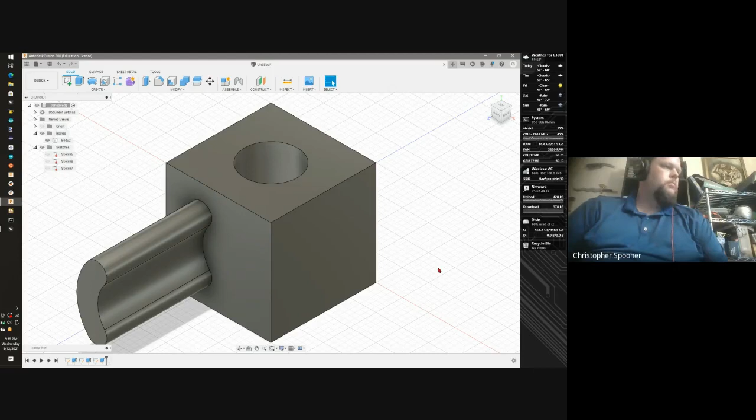What I would like you guys to do, I'll give a little homework because I guess that's the teacher in me, although I don't typically give homework. I want you just to play with, you have 3 more sides of this cube that you can play with easily. Pick some shapes, try locking them down. If you can't get them fully constrained, don't worry about it. But just get used to the process of sketching, constraining, extruding them, okay?

We're going to save this. I'm going to click the little save button. I'm going to call this practice cube. And the save button is the little disk icon right over here. And that will now show up in my Makerspace class project.

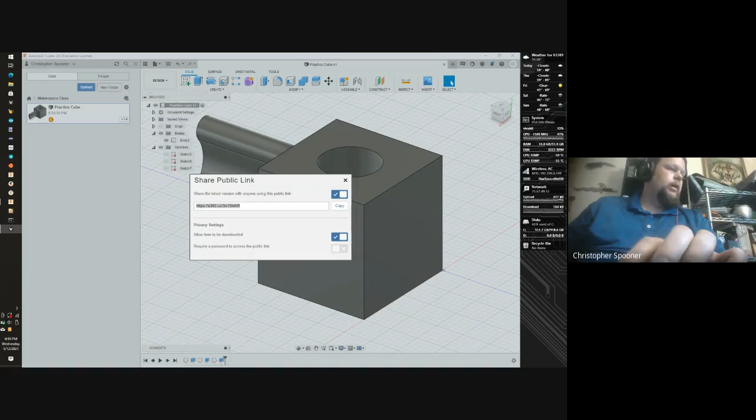I'm going to share. I'm going to give it a public link. Chat. And I will send this email out, but I'm going to paste it. And that way you can come in and see what I did. So you have access to this cube. If at some point between this class and next class you get some stuff done and you want to show me it, share the link with me, send me an email with the link. Or if you have questions, send me a screenshot with your problem, and I can take a look at it and see if I can answer by email, or we can schedule a time to just quickly take a look at it, okay?

So Chris, your link, that's going somewhere in the Autodesk cloud where anybody can get to it? If you click on that, it will open it up in Fusion 360, and you'll be able to see my part and make a copy of it if you wanted to. 'Cause I got asked a question by someone who just joined our Makerspace who wanted to know if he used the hobby level to design something, was his design actually protected? Like from a I intend to patent this kind of view.

You're not supposed to use the hobbyist for commercial uses. So he might hit licensing trouble with it. He might want to either learn FreeCAD, which is awful and really frustrating to use, or look at investing in and paying for a license, because the hobbyist one is not safe for patenting because you're not supposed to use it. It's not for commercial use. Okay. I would not do that. Any other questions for me?

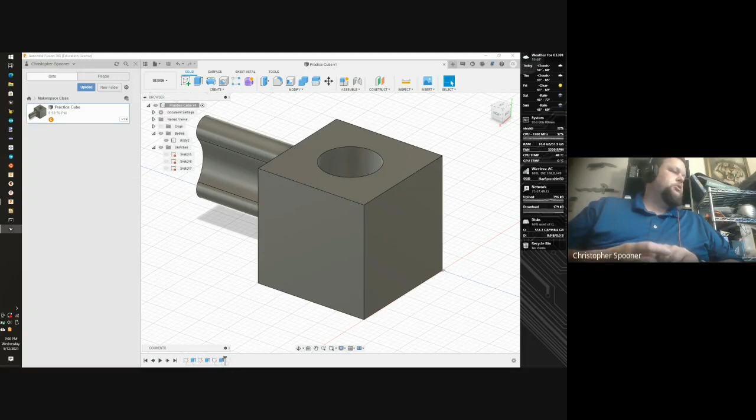Doug, you're muted. I said, Chris, this is kind of the same thing I was doing the other night, just putting a cube and putting a hole in it. And the only thing you probably weren't doing is dimensioning things. So yes, focusing on dimensioning, because when we get to 3D printing, we really need to make sure we're locking down sizes. We'll talk about making shapes for 3D printing our next class.

This shape would not be good for 3D printing because we have a massive overhang here. If we print it here, this hole might not print properly. Holes are okay. Sometimes they can print without support. Sometimes they can't. It depends. We'll talk about that when we start doing the smile keyring. But I'm going to assume that you guys are more comfortable with sketch, constrain, extrude, join or cut, because we're doing that a bunch for the next ones.